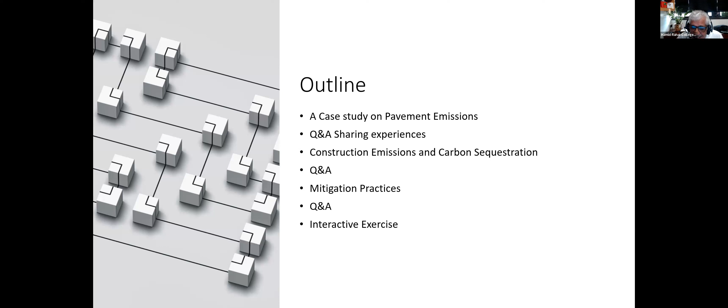Something that came up recently is the regulatory requirements: Congress has identified a national goal for environmental sustainability under 23 U.S.C. 150. DOT Rule 23 CFR Part 490 requires state DOTs and Metropolitan Planning Organizations, MPOs, to establish declining CO2 targets for greenhouse gas emission measures. It does not mandate how the target must be, but shows CO2 reductions over time. It also directs the Federal Highway Administration to establish performance measures that state DOTs can use to assess the performance of the interstate and non-interstate national highway systems.

Our presentation today is not directly associated with this, but it is indirectly associated with it, because it's related to environmental sustainability. And when we talk about environmental sustainability, we are looking at all activities, including construction activities, to reduce global greenhouse gas emissions for a sustainable environment.

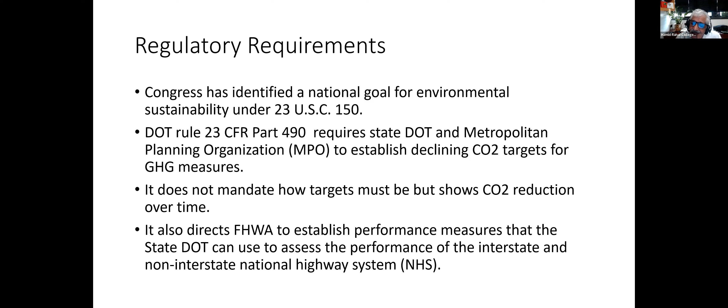So let's talk about our case study on pavement emissions. This is a case study in China.

The road specifications are: the length of the road is 20 kilometers, or about 12.5 miles. The width is 8 lanes, 92 feet. The depth of the road is 28.35 inches, or 72 centimeters. It has a hard shoulder width of 3.5 meters, or 11.5 feet, and a verge in the middle of 0.75 meters, or 2.5 feet. The components you can see here include 3 layers: sub-base course, base course, and surface course, each one with corresponding thickness identified on the right-hand side.

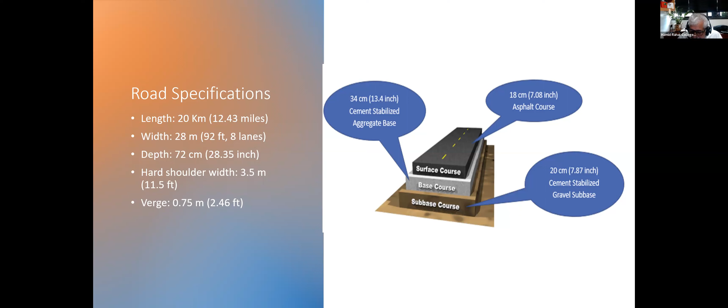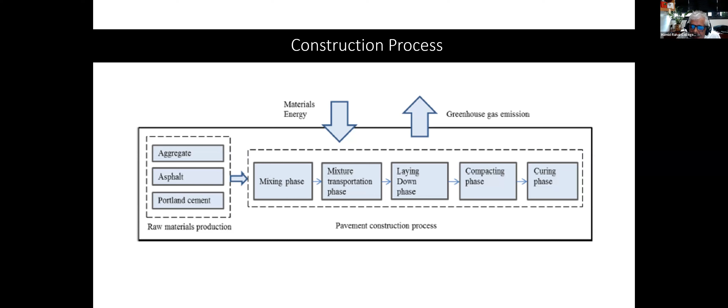So what is the construction process? You look at raw material production, including aggregate, asphalt, and Portland cement. Then we have preparation of the material, including the mixing phase, mixture transportation phase, and laying down phase, and then we go to installation, which includes the laying down phase, compacting phase, and curing phase. For all of these activities, there are greenhouse gas productions associated with the type of fuel we use, the type of electricity, and the type of activity we do for this project. So that's something we're going to discuss right after this.

The total materials used in tons for this project: cement stabilized gravel subbase, the first layer, had over 9,000 tons of cement and 180,000 tons of aggregate. Then cement stabilized aggregate base had over 16,000 tons of cement and more than 320,000 tons of aggregate. And then the asphalt course has 183,000 tons of aggregate, plus asphalt binder and mineral binder on top.

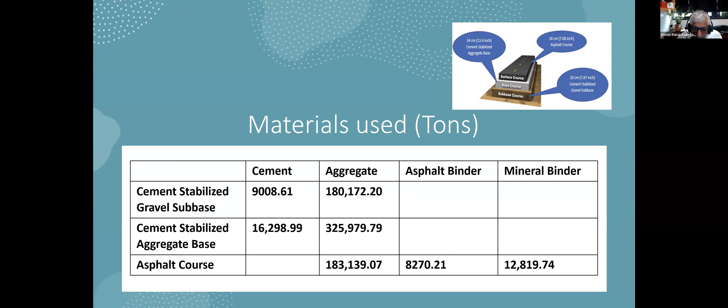The production phase, based on analysis of the type of fuel used: for aggregate in the asphalt course, the energy used for producing this material was over 11 million megajoules, which converts to over 1 million kilograms of CO2 equivalent emissions. Then for the cement stabilized base, over 19 million megajoules corresponds to 1.8 million kilograms of CO2 emissions. Aggregate in cement stabilized subbase used over 10 million megajoules of energy, equivalent to over 1 million kilograms of CO2. And mineral powder in asphalt gives smaller values for energy and CO2 equivalent. In total, for the asphalt material and so on, over 4 million kilograms of CO2 equivalent greenhouse gas was produced.

Now remember, this example is from China. China uses a lot of coal in the preparation of materials, and a big chunk of this emission corresponds to the burning of coal as a fuel.

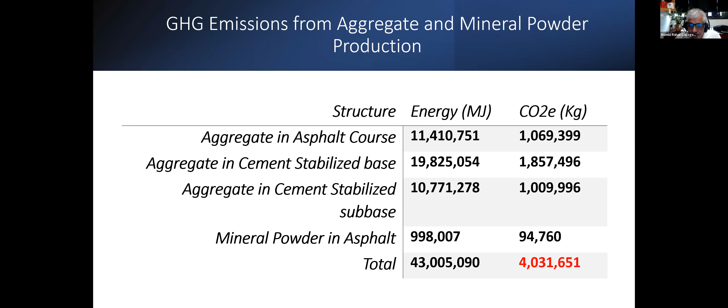Then we have the greenhouse gas emissions from cement production. The gravel subbase uses over 325,000 megajoules, corresponding to 27 million kilograms of CO2 equivalent. And then we have a cement stabilized aggregate base that gives you over 11 million kilograms of CO2 equivalent.

I put a note on the bottom about how it has been calculated. A ton of cement consumes about 97.4 kilowatt hours of electricity, 116 kilograms of coal, and 0.2 liters of diesel, which produces this much CO2, and also N2O, which is a greenhouse gas, about 1.53 kilograms, and about 3.414 kilograms of methane. This doesn't seem that high, but the volume of cement used in this project is so significant, that's why you see so much CO2 equivalent produced.

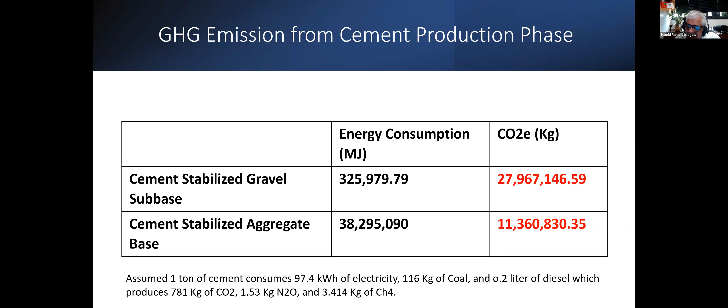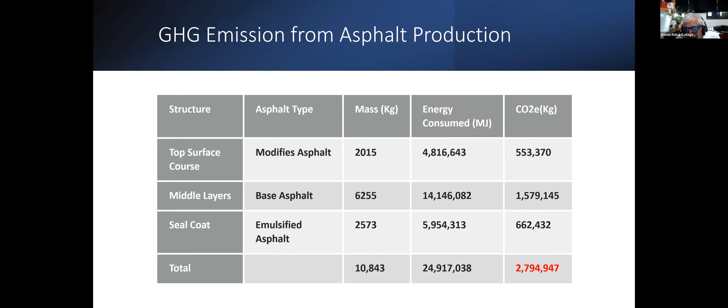So now we are talking about the asphalt production phase and installation phase. Again, the corresponding mass, the energy consumed, and the CO2 equivalent produced for the top surface course, middle layers, seal coat, and so on. Totally it comes out to be over 2.79 million kilograms of CO2 equivalent produced.

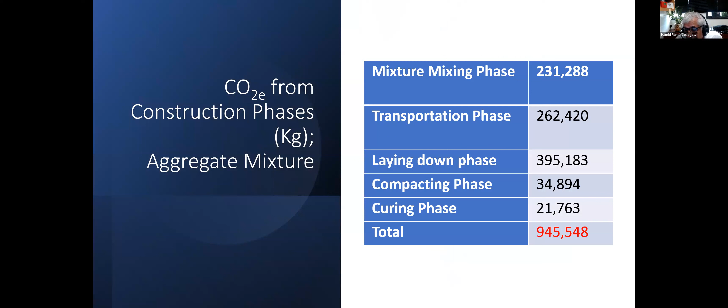So if we look at the construction phase, including aggregate - mixing phase, transportation phase, laying down phase, compacting phase, curing phase - all of these, when added, come out to a total of 945,000 kilograms of CO2 equivalent.

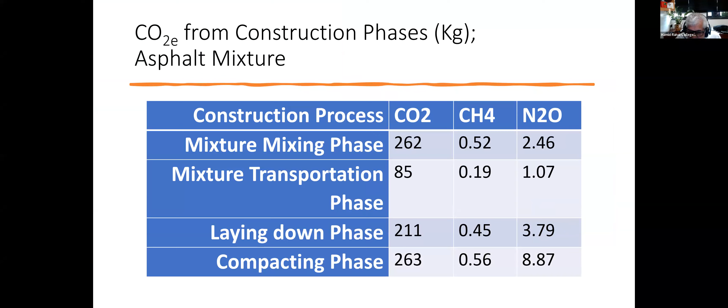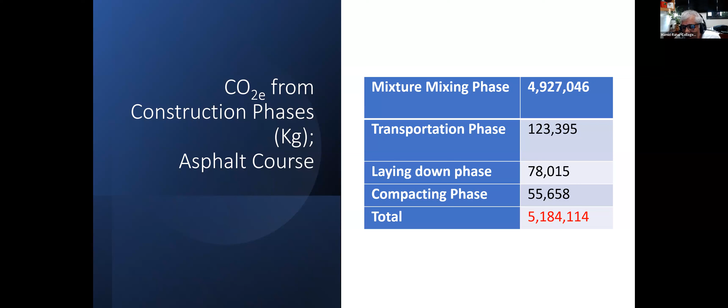So if you look at total activities from asphalt installation, laying down, compacting, and everything combined, the mixing phase altogether is over almost 5 million kilograms of CO2 emissions. Transportation phase, about 123,000 kilograms of emissions. Laying down phase is 78, compacting phase about 55,000. So altogether, over 5 million kilograms of CO2 emissions is produced.

And then we have aggregate mixing, about 231,000, transportation phase 262,000, laying down phase 395,000, compacting phase 34,000, curing phase 21,000. So the reason for this slide is to show the contributions of aggregate production and cement production to the total CO2 emissions in these construction projects.

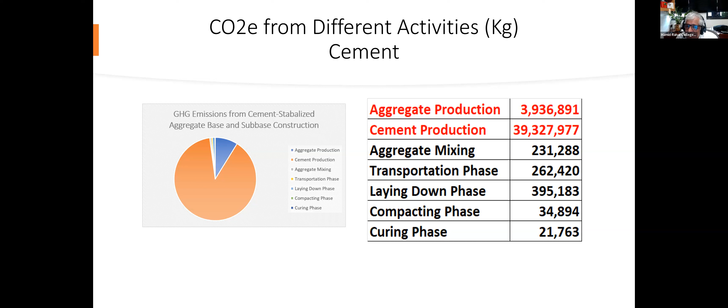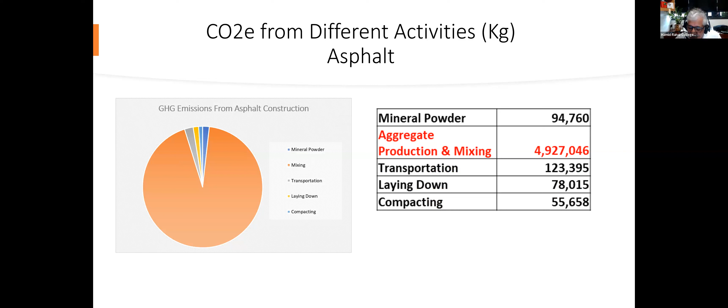And if I go back to the previous slides, you can see that in the case of asphalt production, the aggregate production and the mixing phase contributes significantly to the CO2 emissions in these projects.

If you look at cement manufacturing, you can see why we have so much CO2 emissions from cement production. We start with raw materials, then we have a crusher, transport, we have a raw mill, and then we have to heat this raw material - that's where we have a lot of energy per ton. It's 3,150 megajoules of energy per ton of cement that needs to be heated. It produces about 479 kilograms per ton of CO2 in the calcination process, and 319 kilograms per ton of CO2 from the fossil fuels used in this process.

And then we have the cooler, cement mill, and then we have the logistics, which is the transportation and so on.

If you look at the total energy used for producing 1 ton of cement, it's almost 4,000 megajoules. The corresponding CO2 produced for this 1 ton of cement is 925 kilograms. So when you compare materials per unit in terms of energy used for production, you often see that the factor is that significant for cement.

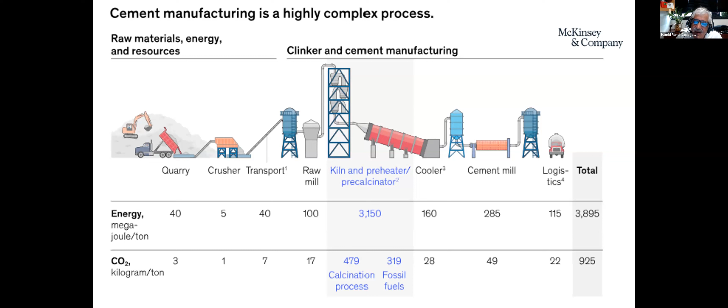With that said, we will transition to discussing embodied energy later on, as a factor that we can use to estimate the energy used in producing this material, and how much CO2 emission is produced from that as an estimate.

I wanted to share this slide that talks about the contribution of different industries to global CO2 emissions. This is data from 2017. You can see that cement production's share is 7% of global CO2 emissions.

If you compare with gas and oil, it's 4%. Iron and steel are 8%. Building, transportation, power, and agriculture contribute significantly. You can see the segmental breakdown of this.

In terms of the dollar amount - kilograms of CO2 produced per dollar - cement is significant compared to the others. Chemicals is 0.3, iron and steel is 1.4, mining 0.4, oil and gas 0.8. So the other industries are less CO2 intensive as compared to cement production.

Overall, when we look at any construction project, we have to lay out the process of construction that includes the materials used, the energy used to produce those materials - which relates to embodied energy that we will discuss - and then the process of transporting and preparing these materials to the construction site, and the manufacturing or installation of the project at the site.

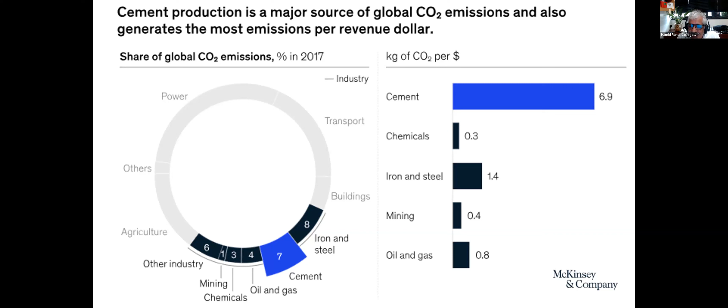With that said, I am going to transition to Q&A here. Do you want me to stop sharing, Tom, before we move on? No, you can, Hamid, you can keep the slide up.

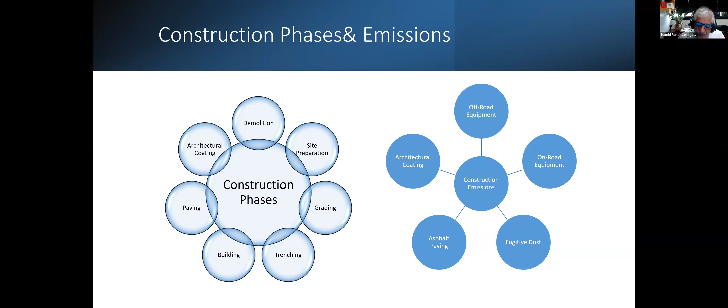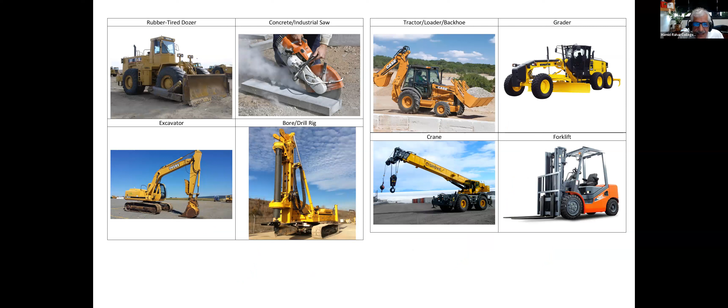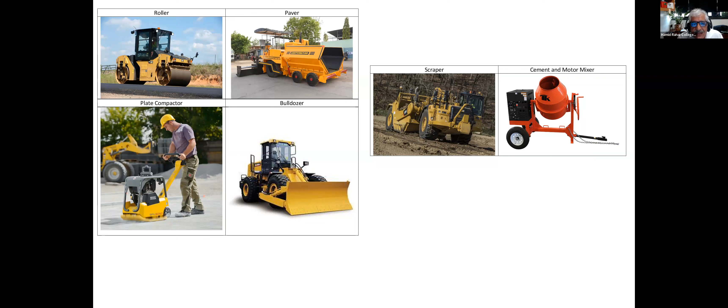So typical construction equipment, you can see here dozers, excavators, bore and drill rigs and saws, obviously tractors, cranes, graders, forklifts, rollers, bulldozers, compactors, mixers, scrapers. All of these are typical construction equipment that we use in any kind of construction project.

Almost 90% of these equipment use diesel fuel as the fuel of choice. But you know that in some cases we have CNG, in some cases we have LNG. There are machineries nowadays that are fueled by more or less intensive carbon fuels. So if those are the case, then we need to calculate CO2 equivalent.

So greenhouse gases are rated against CO2 in terms of their global warming potential. CO2 has a global warming potential of 1. That is the reference. And on the right-hand side is a table of typical GHG gases. To convert any other GHG gases to CO2 equivalent, we multiply the global warming potential of that gas by the volume or the mass of the gas.

So you can look at this: CO2 is 1, CH4 is 25. Methane you get mostly in agriculture and also from CNG and LNG fuels. You also get N2O in fuming, especially asphalt fuming in construction. N2O is another one. It has a GWP of 298.

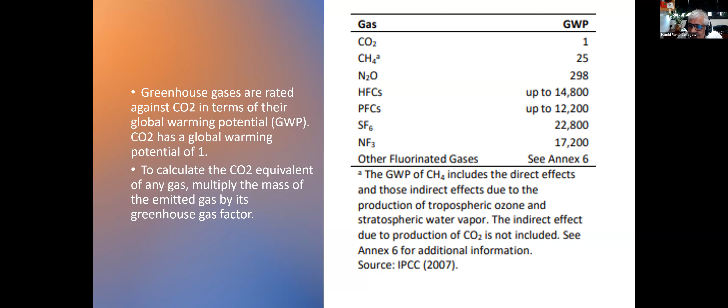So in the semiconductor industry, for example, the amount produced is not that big, but because of these GWP factors, the total becomes significant. But in construction, mostly we are concerned with CO2, CH4, and N2O, as you saw from the example that I presented.

So let's look at a factor called embodied energy that we use to assess the contribution of GHG from preparation of the materials. In general, embodied energy is the total energy associated with the production of a structure, from mining and processing to manufacturing, transport, and installation.

It is an estimate, as the fuel and electricity sources used for all these processes could be different. It is very difficult to have an accurate account of the total energy associated with the production of the structure. As I mentioned, when we look at the sources of the materials used in construction, sometimes the materials are produced using coal, as you saw in the example that I mentioned.

Sometimes diesel fuel is used, and so on. And then in transportation, it depends; mostly we use trucks and different kinds of transport vehicles that use diesel. But if they are different, then we have to account for that. So it becomes very difficult in any construction project to calculate embodied energy from the beginning to the end. So instead of embodied energy, we use process energy requirement, or PER.

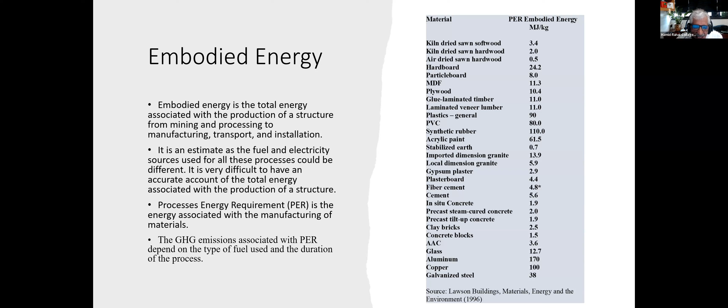So how do we reduce greenhouse gas emissions in any construction project? Some of the practices for reducing embodied energy: use locally sourced materials to reduce transportation. Reuse and recycle materials from demolishing existing structures. That is very common, or you tap into recycling markets that are available in the US, and I'll talk about it at the end of my presentation. Give preference to materials manufactured using renewable energy sources. Select low embodied energy materials, avoid wasteful material use, design for long life and adaptability using durable, low maintenance materials.

Now, of all these bullets, the top ones are significant. If we reduce transportation, we reduce greenhouse gas emissions. If we reuse and recycle materials, whether from an existing structure that is demolished or from the recycling market that's available, then again we reduce greenhouse gas emissions. If we use materials produced using renewable energy sources, we reduce greenhouse gas emissions.

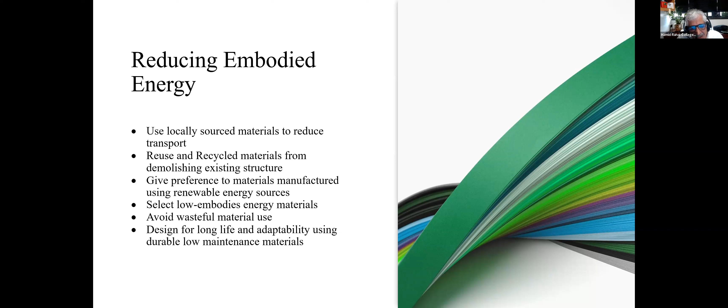So these are the factors that you can use in any proposal or project to emphasize that the intention of this project is to use this percentage of recycled material, or we will use this locally sourced material to reduce transportation, and we reduce greenhouse gas emissions.

So let's talk about on-road vehicle emissions. On-road vehicle emissions mostly come from transportation of processed materials and raw materials to the site. When we want to calculate the emission from this, there is the vehicle miles traveled, how far we have to move the material to the site. And then there is an emission factor; I'll show you the list of emission factors for the vehicles in a moment. The emission factor depends on the type of fuel that we use. If you multiply the emission factor by the VMT, vehicle miles traveled, you get the total emission.

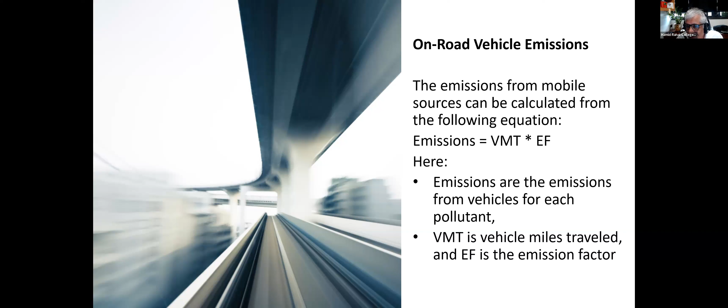You can have that from any of the vehicles that you use. So you can have multiple trips. You need to come up with the total vehicle miles traveled: if you use one vehicle, or if you use 8 vehicles of one type for delivery, then 8 times the distance is the total VMT, times the corresponding emission factor. If you use different kinds of vehicles with different fuels and specifications, the emission factor would be different. You have to calculate them individually and then sum them up to come up with the total emissions from on-road vehicles for your construction project.

Then you have the off-road equipment. It's a little bit more intense because we use a lot of off-road equipment to be able to do any kind of construction projects. In general, this is the equation used by CARB under the Off-Road 2011 methodology: emission is the summation of the emission factor times the number of vehicles involved, type of vehicle, the horsepower of that vehicle, the load factor of that vehicle, and the activities.

Activities are hours per day. The default values are 8 hours per day, 5 days per week, so that's 40 hours of operation. Horsepower is the average horsepower of the equipment. Load factor is the ratio of the actual output to the maximum output. It is dimensionless.

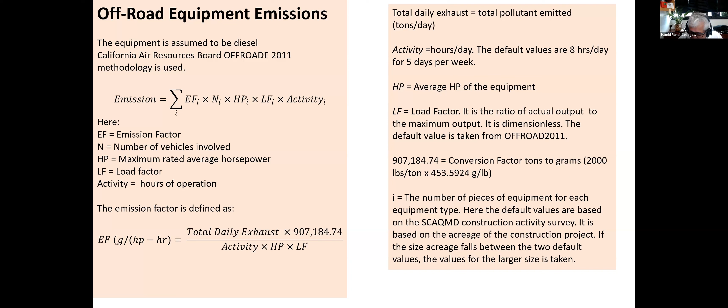So you may use 5 tractors, loaders, excavators, or something like that of the same type. For each set of equipment of the same type, we need to calculate the total emissions based on their specifications. At the end, we sum them up, and that gives us the total emissions on a daily, monthly, weekly, or total basis for the project, based on this summation from every equipment that we have.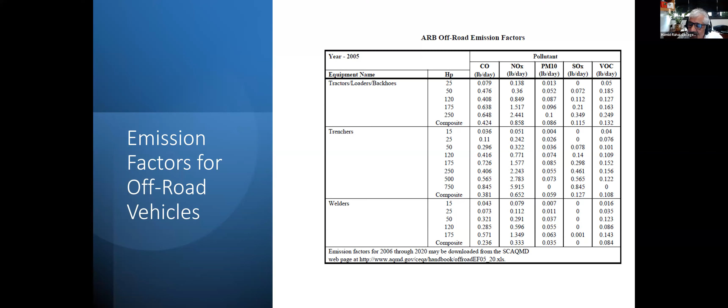So we have atmospheric carbon. What are the sources of atmospheric carbon, CO2? There are two primary sources: natural and human activities. The natural source is primarily from animals that exhale CO2 as a waste product, and methane or CH4 from fermentation in the rumen of cattle. Human activities obviously come from burning fossil fuels - from energy production that requires burning fossil fuels, from transportation, from all activities within society that use fossil fuels as a source of energy.

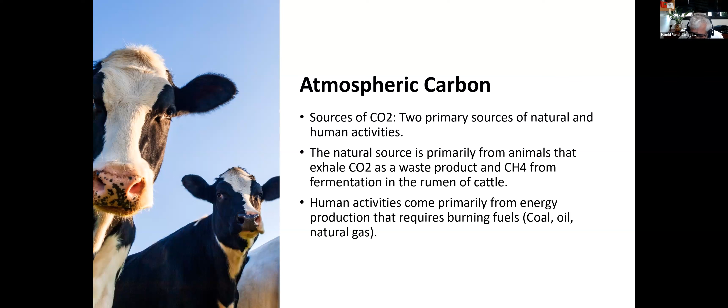So we talk about carbon sequestration. It is the process of capturing and storing atmospheric CO2. There are two types: geologic and biologic. Geologic is the process of storing carbon dioxide in underground geologic formation. The CO2 is generally pressurized until it becomes liquid, then injected into porous rock formations in geologic basins.

It is also used for oil production - this process enhances oil recovery. The liquid CO2 is injected into the oil-bearing formation in order to reduce the viscosity of the oil and allow it to flow more easily to the oil well.

Biologic is the process of storing CO2 in vegetation, soils, woody products, and aquatic environments. This is the one we use a lot in construction. A lot of the time we have to clear vegetation on a piece of land in preparation for a construction project. So we have to assess the carbon sequestration of the land before starting the construction project, and then the carbon sequestration after the construction project is finished.

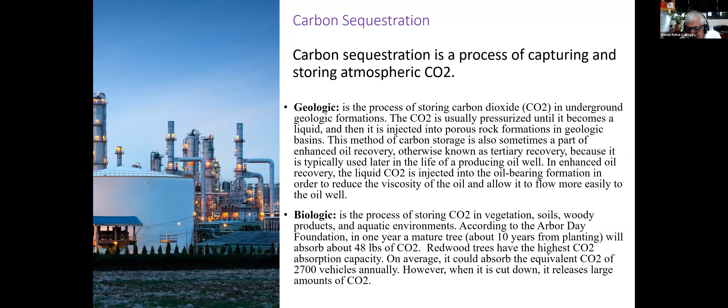However, when a redwood is cut down, it releases a large amount of CO2. That's why for redwood trees you often need a permit to cut it down, and you have to have other mitigation measures to show that, instead of just cutting it down, your intention is to plant trees to recover and reduce the greenhouse gas, or recover the CO2 that was released into the atmosphere.

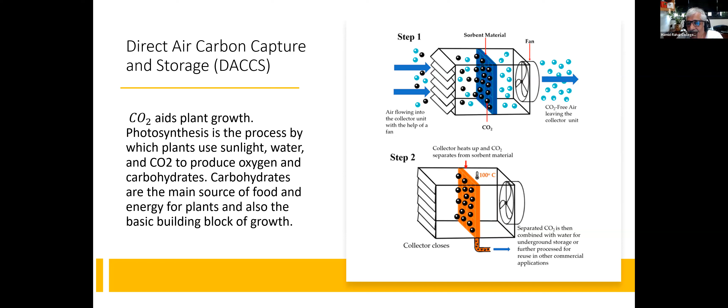For any project, as I mentioned, if you are clearing land that had vegetation before you start—whether it's a road, bridge, or anything else—you need to assess the difference between before and after in terms of how much carbon is reduced. So you're assessing carbon sequestration before you start the project, and carbon sequestration after you finish.

So your proposal needs to include a process showing how, after the project is done, you mitigate the carbon sequestration that existed before you started. It's a summation: what's the area, how much CO2 was sequestered before and after the project, and you get the difference. If the difference is zero, then you have a net zero gain.

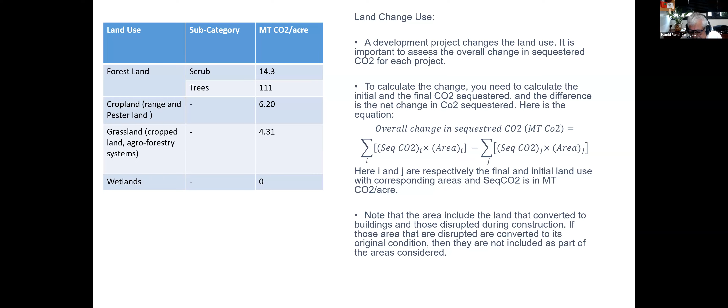So with that said, that's an overview of construction activities and emissions from construction activities. I want to pause here for any Q&A, or if you want to share any data or information with everybody, before we talk about mitigations.

Scott? Excellent, Hamid. I have no questions. Excellent. Does anybody have any question?

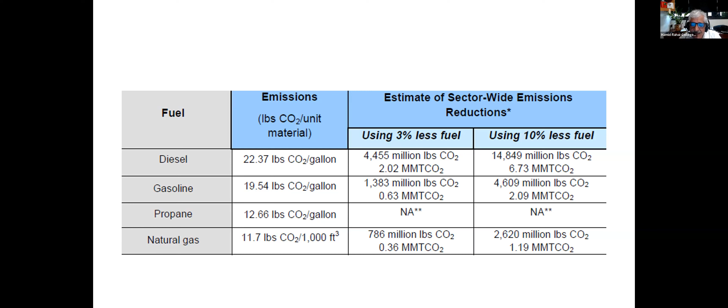There are also engines that use humid air systems that we have put out and patented that cut down greenhouse gas by over 60%. This is for natural gas, and we also tested our system on diesel engines. You know that diesel engines also produce a lot of NOx, or N2O, as a component of greenhouse gas. If you use a humid air system on a diesel engine, you also cut down greenhouse gas production by 60%.

Idling: a Class 8 diesel engine at high idle consumes 1.2 gallons of diesel per hour, resulting in 26 pounds of CO2 per hour. At low idle, it consumes 0.6 gallons per hour, equivalent to 12.8 pounds of CO2 emitted per hour.

A 2005 study of construction equipment in California shows that on average heavy-duty diesel trucks idle over 29% of their operation time. Another study indicates that reducing idling by 10% results in over 500 pounds of CO2 emission reduction annually. So reducing idling reduces fuel consumption, provides significant savings, and reduces greenhouse gas emissions. Reducing idling is another factor in reducing greenhouse gas emissions in construction.

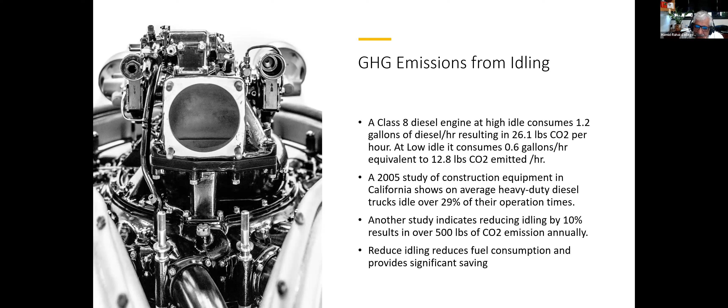One thing I have to mention is that a lot of Class 8 diesel engines, especially in cold environments, are hard to start. If you turn them off, then it's hard to turn them back on, because of the process and so on. That's why they keep them running all the time. I'll talk about biofuel in a moment, and you'll see that there is actually a way of reducing greenhouse gas emissions in that case.

Equipment maintenance: improperly inflated tires and poor wheel alignment reduce the fuel efficiency of heavy trucks by 3 to 4%. Improperly maintaining equipment increases greenhouse gas emissions. For example, an improperly maintained propane-powered forklift could emit more than 2.3 tons of CO2 per year. So maintenance is another thing we need to do on construction equipment to make sure we can control the amount of greenhouse gas emitted during construction.

Biofuels: the emission factor for Bio 100, meaning 100% biofuel, is zero — 0 CO2 per gallon. If we switch to 3% biodiesel, we again save over 2 million metric tons of CO2. If we switch to 10% biodiesel, we reduce CO2 emissions by 6.73 million metric tons.

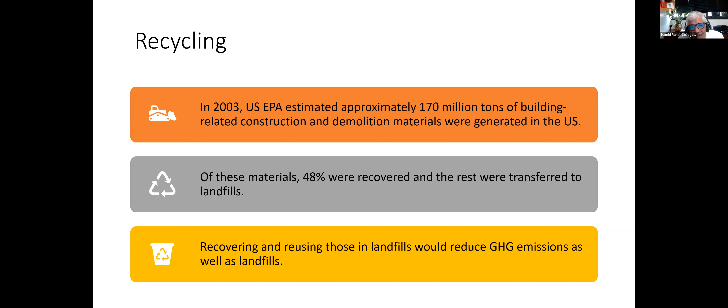Recovering and reusing those materials would reduce greenhouse gas emissions as well as reducing landfill use. So it's important — recycling is a major way of reducing greenhouse gas emissions.

If you go back to the examples that I presented, you will see that because of the production and mixing of the aggregates, there is a lot of greenhouse gas emission produced during that process. If we can use recycled material, that is a saving for us, and it can be used.

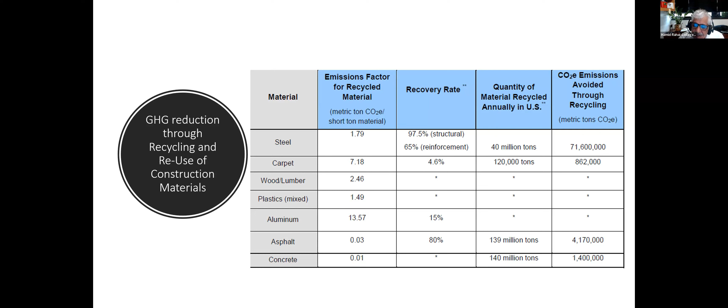So basically, to go back to the initial slides on ways to really reduce greenhouse gas emissions: it is the type of fuel that you use, and equipment idling. If you can reduce equipment idling, you can reduce greenhouse gas emission. The type of electricity used, is it from renewable energy, or from a plant with coal or anything? So electricity usage, reduction of electricity usage, and the source of electricity are major factors here.

Equipment maintenance saves you fuel and reduces greenhouse gas emissions. Equipment selection, the type of equipment that you select, matters. Material recycling is a major component of reducing greenhouse gas emissions. Material selection has some effect. Material shipments, the process of shipping material, has some impact.

So if we can have locally sourced material and locally sourced suppliers, then obviously we reduce the transportation, the vehicle miles traveled, so we reduce emissions. Employee commuting, if employees are on the site, obviously we reduce traffic and reduce greenhouse gas emission, but it's not that significant. A lot of time we have projects at very different sites in the US, far and different locations, that require some commuting. So obviously that has some influence, but it's not significant.

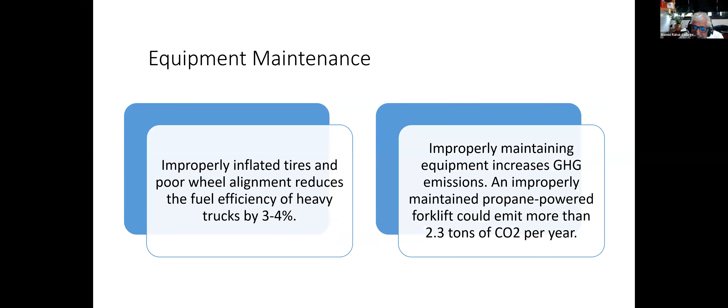So with that said, that concludes my presentation before we go to interactive exercises. Any questions?

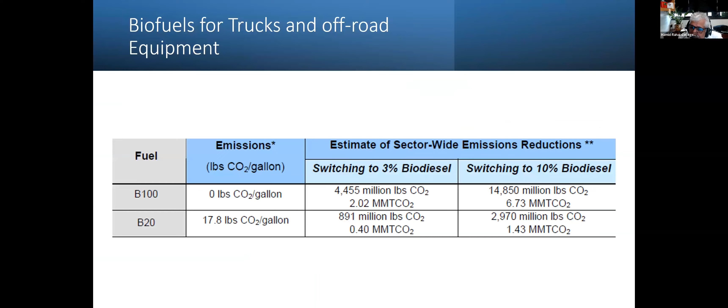Yeah, as I mentioned, if you go back to this one, the overall assessment of a project from the Department of Transportation, you can see that employee commuting is a factor. Now, how much that is a factor compared to the total emissions you get from the project, that's something you may assess to see how much it is worth cutting down.

I can tell you there was one case study I was reviewing for a city in California. It was an agricultural project, not a construction project, but they were transporting people from different sites to the agricultural site for the activities. They came up with an estimate of how much CO2 emission they get from this transportation. Then they assessed how much it costs them if they house people at the site or in the nearby city, and how much CO2 saving they get.

Based on that assessment, they offered temporary housing to the people who were working on the site to live very close to the project. Not only did they improve safety, cutting down the potential for any kind of accident, but they also cut down on CO2 emissions. And in terms of cost, they had fuel savings, because they actually rented buses to move people on a daily basis, collect them and bring them to the site, and there's cost associated with that. So they had savings in that.

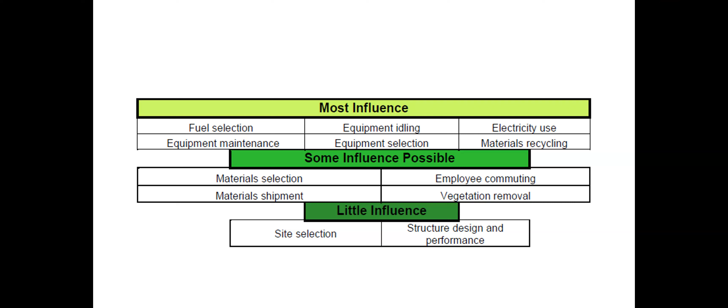Thank you for coming. You're welcome, sir. Any other question?

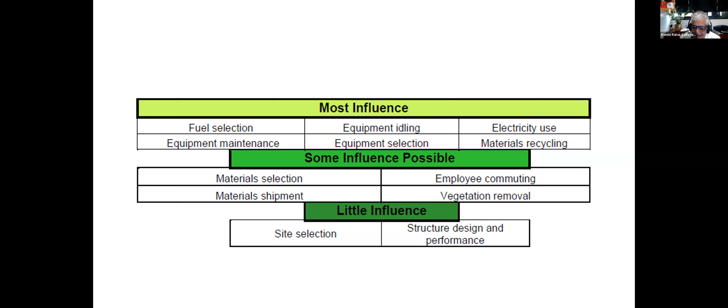Okay, so I don't see any other question. So I'm going to stop sharing and move to the exercise. Scott, did you email everybody the file? Yes, everybody got a copy. Okay. So this is a not very sophisticated Excel spreadsheet that we developed quickly for these presentations. Let me just close this.

I don't know if everybody can see my Excel spreadsheet. We can. Excellent. You could probably zoom a little bit. Okay, so let me see if I can. Is this better? Yeah, that's great.

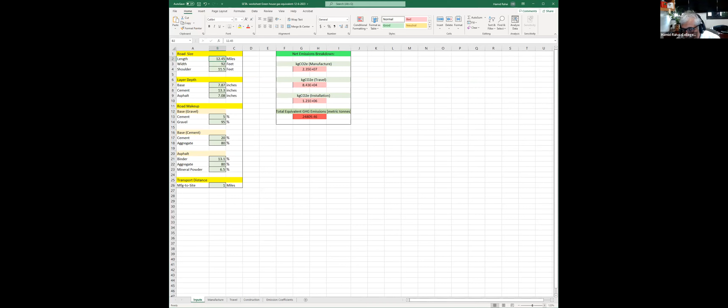Excellent. So this is basically based on the case studies. So we put in everything according to the case studies. The only thing that is different is the emission factors that you can see here: we included the global warming potential of CO2 and embodied energy according to the data from the US DOT and also the US construction industry. So in terms of the CO2 equivalent that is produced, it's based on activities in the US.

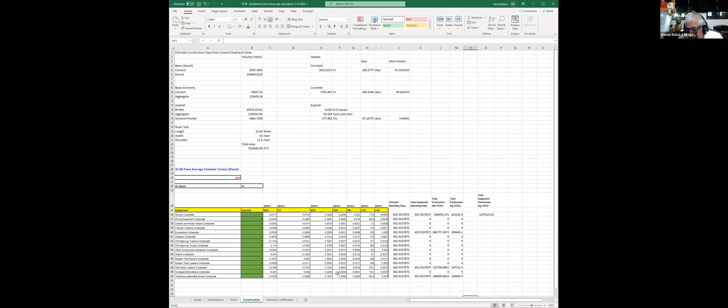And if you look at this, we also put in information about the equipment, paver, cement mixer, crawler, other things, and how much CO2 and greenhouse gas emission they produce, and the corresponding CO2 equivalent in there. In terms of traveling to the site, it's again based on the case studies, based on the capacity of the truck. We put the number of yards being transported, and then we use the total material to estimate the number of trips, because that case study doesn't provide information on the number of trips. So it's an estimate, I should say that.

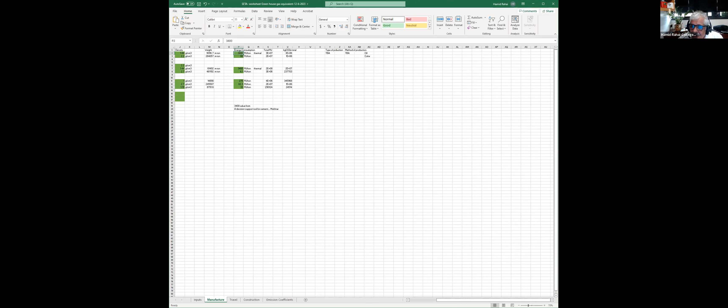Also, we have information about the manufacturing of the materials and how many megajoules of energy and the corresponding kilograms of CO2 are produced. You can see that. So let's look at the input. First of all, the length was 12.45 miles, as you can see here, with the width and shoulder. These are the specifications that you can change. For the road makeup of the base, we assume cement is 5%, gravel is 95%, or cement 20%, aggregate 80%.

And then we have aggregate. For the asphalt production, we have binder 13%, aggregate 80%, and mineral powder 6.5%. All of these can be changed. And then the estimate of the metric tons of greenhouse gas emission produced, based on the emission factors that we put in different tabs, and the embodied energy, is given and highlighted in red. So there is an equivalent for manufacturing, for travel, and for installation, and the summation of those gives you the total greenhouse gas emission.

So if I change the length to 20 miles, you can see that the data on the right-hand side table changes quickly. If I set the transport distance from manufacturing to site to 20 miles, again, those change. So you can change those things to come up with this.

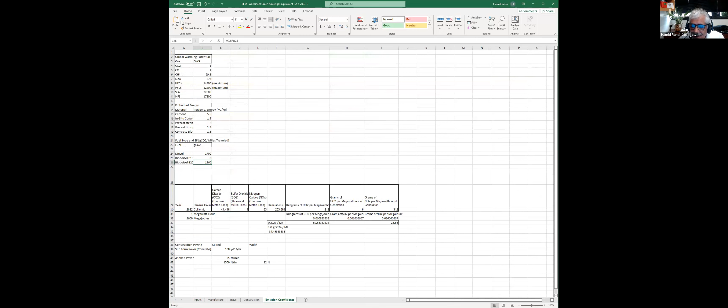Now, in terms of the emission coefficients, let's see if I can get to the travel. We talk about the use of different kinds of fuels. Now, we haven't really put in all the information there. So this spreadsheet, even though it's very simple, is 80% complete. But our plan is to include biodiesel, both B100 and B20, so that you have the choice of selecting those to see how much emission reduction you get. And again, here you get this option.

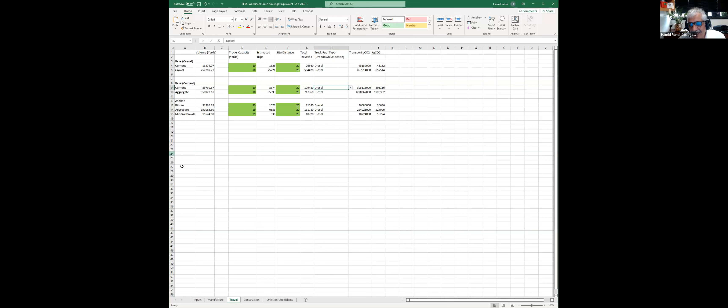So once we have those in there, there are some variations you can play around with in terms of the distance for travel, the amount of raw materials used, and the size of the road, length, width, and so on, to get an estimate of greenhouse gas reduction. Again, this is a very simple spreadsheet based on the example I provided. Our work continues to make it as comprehensive as possible.

So to take into account other elements that I mentioned in terms of recycling: if you change the percentage of the material to recycled material, how much saving you get. This spreadsheet doesn't take into account employee participation, employee travel, and other things like this.

But that gives you a way of playing around with the numbers for any of your own projects, to see what the baseline is for these pavement projects, and you can actually use this for on-site projects if there is no traveling involved.

So for the road size, you can put the length, width, and shoulder. You can put an estimate of the area, and then the rest of the stuff can be changed. But this is for pavement, basically. We designed this for pavement.

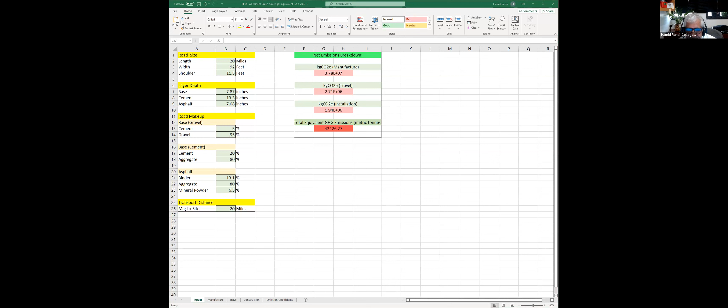I have, let's see, in the chat. Okay, so thank you so much, Taylor. I saw in the chat you put a note: take care of yourself and happy holidays to you. Hamid, thanks so much for your time today and for sharing this research with us. Thank you so much, thank you everybody.